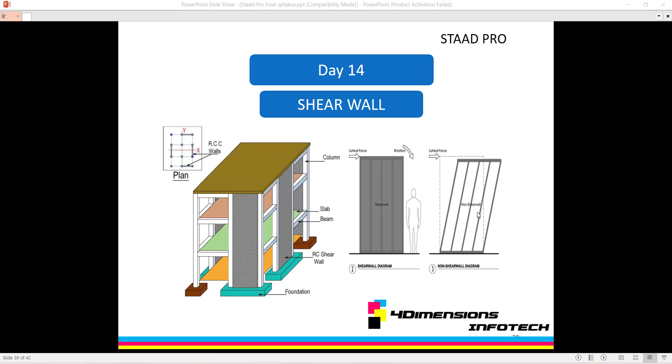Shear wall is a structural member in a reinforced concrete frame structure to resist lateral forces such as wind forces, earthquake forces, etc. Shear walls are generally used in high-rise buildings subject to lateral wind and seismic forces. In reinforced concrete frame structure, the effect of wind forces increases in significance as the structure increases in height.

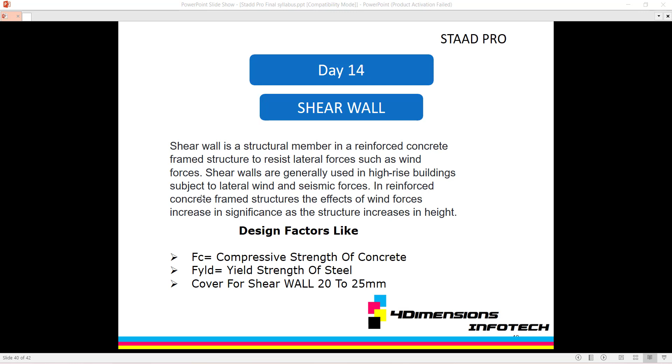So these are the main factors which we include in a design. Like FC is the compressive strength of concrete, like grades. Fy is the yield strength. Cover of shear wall is 20 to 25 mm. So let's design this in STAAD Pro. So I just click over here in STAAD Pro.

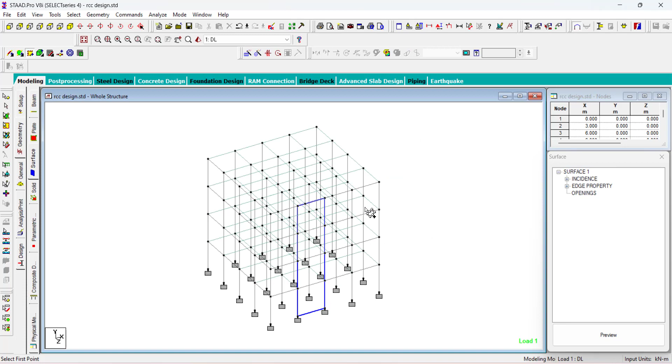For addition of shear wall, click over here in geometry, click on add surface option. Add surface पे क्लिक करने के बाद इस तरह से यहाँ तक हम एक surface create करेंगे for the shear wall design. So click over here. One more time click on close. You want to delete the result file? Yes. अब यहाँ पे shear wall add करने के बाद this is the shear wall. If you click on a surface and just select, this one is the shear wall surface like this.

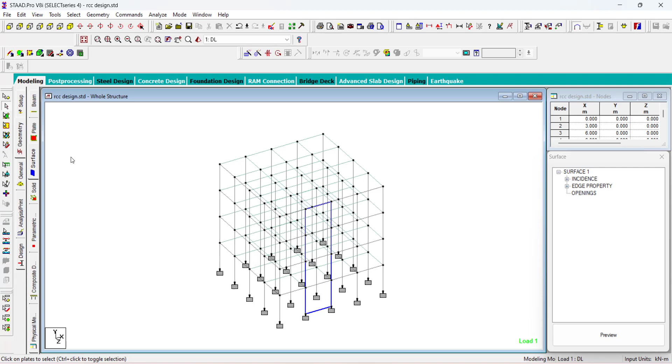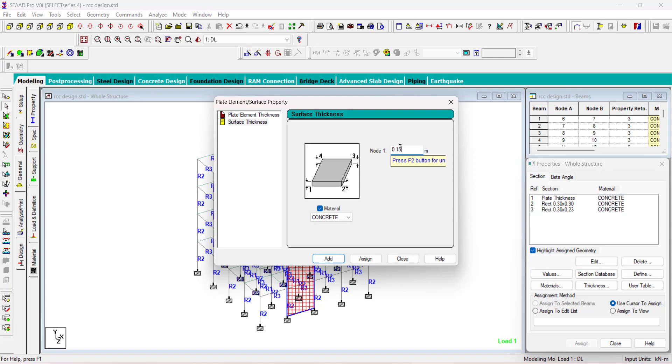Select this surface, click on general option. After clicking on general, click on property option and then add a thickness. So click over here for the thickness, click on surface thickness. अब हमें surface thickness ऐड करना है for the shear wall। 0.15 हम ऐड करेंगे surface thickness shear wall के लिए। So click on add option and then click on close option.

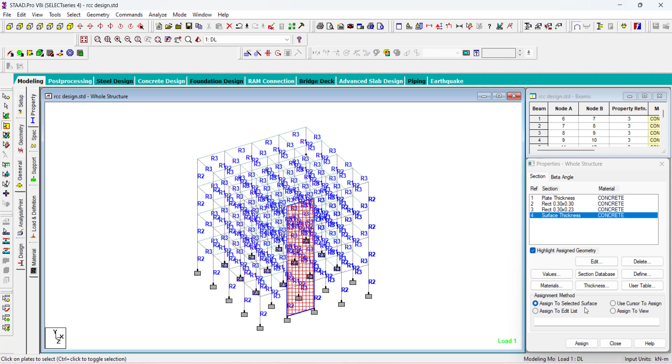Now I want to assign this surface to the particular shear wall. So just click on it and then click on assign to selected surface, or otherwise you have to select this surface by clicking over here, surface cursor. हमने पहले ही select करके रखा है। So this one is the shear wall surface cursor and then assign to selected surface, click on assign, click on yes.

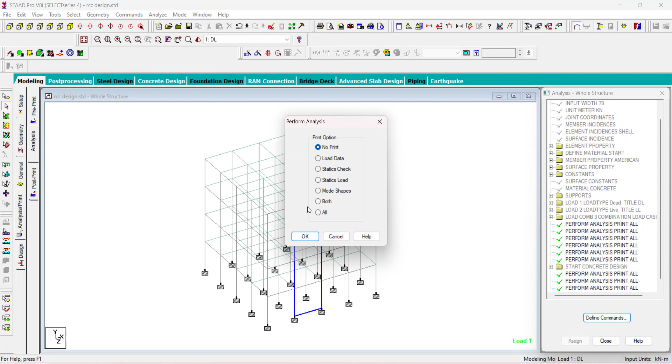Click on all option, click on add option and then click on close. One more time click on commands, analysis, perform analysis, click on all, and then click on OK, and then analyze, run analysis, click on save.

So like this way, zero errors. Go for the post processing mode, click on done option, select all the combinations, and then click on apply and OK. So we have to know the design for this shear wall.

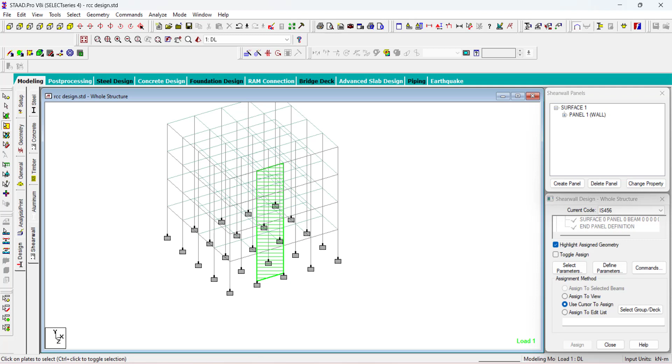Now we have to select the parameters for this particular design. So click on select parameters. Select parameters करने के बाद यहाँ पे क्लिक करना होता है आपको. So click on it and then select the parameters like clear cover हमें ऐड करना है, FC ऐड करना है. FC is the compressive strength of concrete. Then we have to add yield strength of main reinforcement, that is FY main.

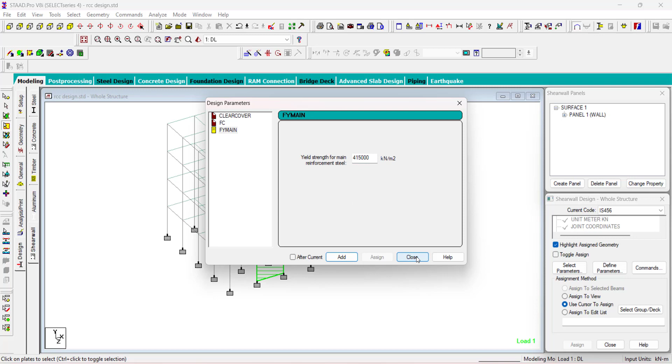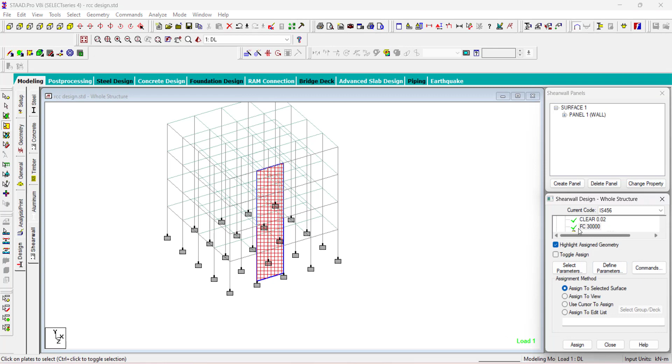So just drop down, scroll this part, and then this one is the clear cover, this one is FC, and this one is FY main. We have to assign this. So click on clear option, click on assign to selected surface, and then click on assign, yes. FC, click on select this, click on assign to selected surface, click on assign, yes, and then FY main, click on assign to selected surface and then click on assign, yes.

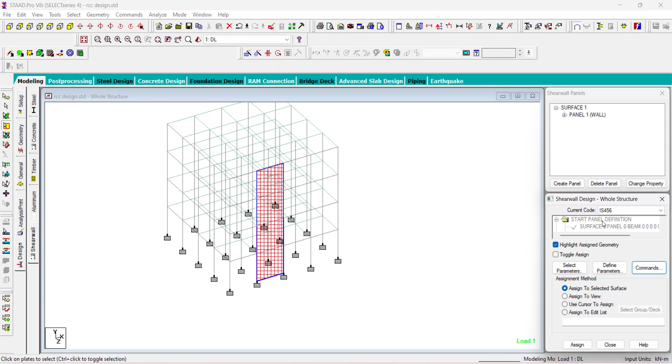Now go for the commands, click on commands option and then add a shear wall design, that is this command will design for the shear wall. So click on add option and then click on close option, and after this we have to assign it to this particular shear wall. So just drop down there, select this design shear wall option, click on the surface and then click on assign to selected surface, click on assign, click on yes.

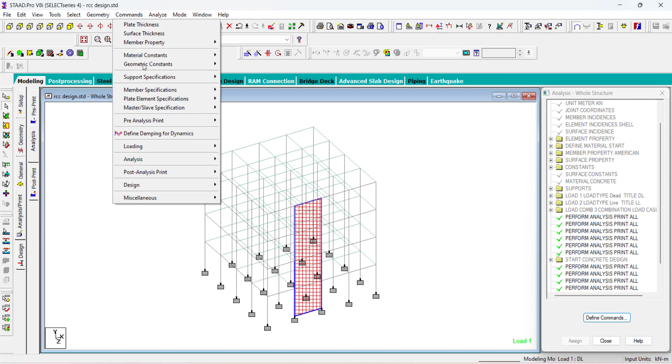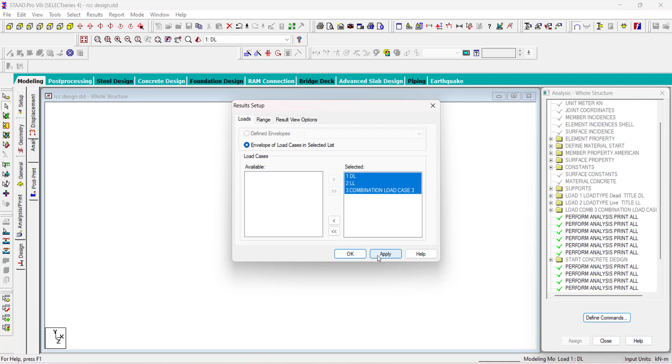So after complete analysis, make sure you have 0 errors. Then go for the post processing mode, just select all, click on apply and OK. So like this way you can see the reaction, displacement, beam. Then click on the surface. If you have to select the maximum absolute stress for the particular shear wall, you can click over here and apply. So this way, here is the maximum absolute stress.

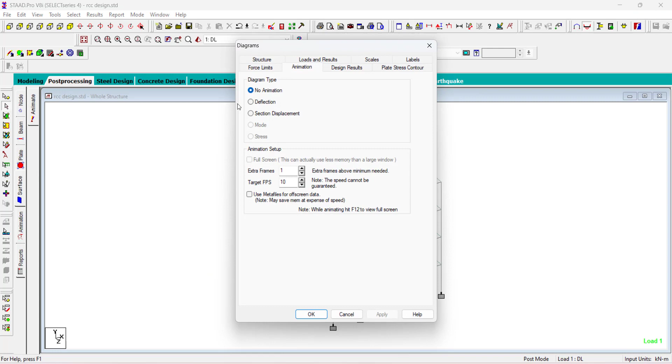Then click on animation, click on deflection, click on apply and OK. So this one is for deflection purpose. Now we have to use this. Suppose अब हमें shear wall का design देखना है, so just double click on it, and these are the property and geometry. These are the surface forces. You can see the surface forces here, that is Fy, Fx, moment, like this way. Dead load, live load, combination for the dead load and live load.

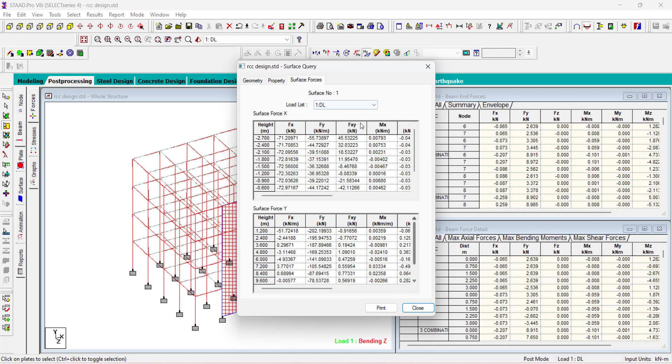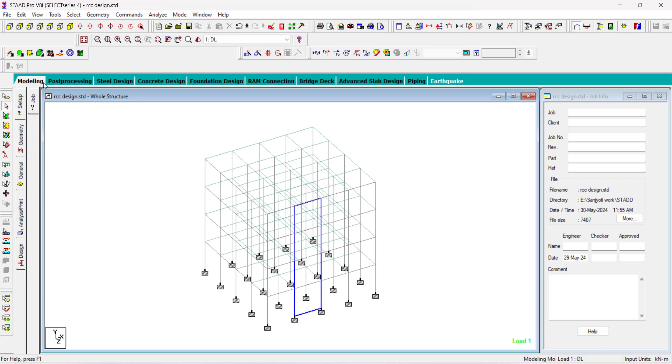So this is all about shear wall. If you click on modeling and then click on 3D view, this one is the shear wall. So like this way we can design a shear wall. So this is all about day 14. In the next video we learn day 15 commands.